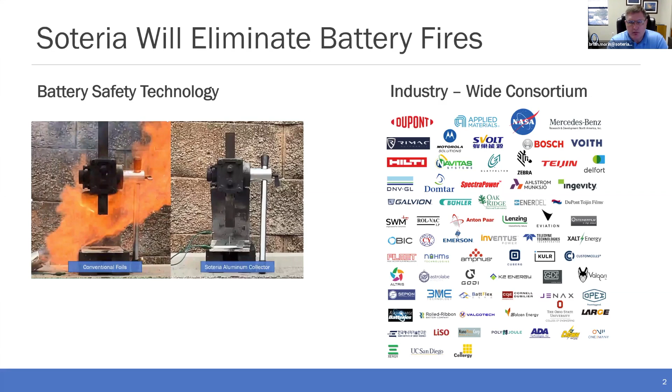They have about a $500,000 electric supercar, and we've told them they can pay their consortium fees in automobiles if they'd like. That's a joke. It's all you get out of a physicist.

The business model, we're combining kind of two models. So the first is we take our technology, put it out to the consortium as an open innovation platform. So think the Microsoft IBM PC platform, where all of these companies are now developing the software and disk drives and printers that need to be used with our technology, as well as developing the components and the ways to use our technology. So that's the open innovation platform.

The beauty is the hard work is being done by our consortium members, who are the best in the world at what they do. So then our route to market is to set up a supply chain that's acceptable for the battery, electronics, and automotive industry by licensing the technology to advanced materials companies. Think DuPont and Teijin sitting in Mercedes' supply chain, not a startup trying to provide a critical component. We've sold one license, and we have 10 consortium members who are scaling our technology on their manufacturing plants in order to become licensees.

The next two: because our cells will pass safety tests that every cell made today will fail, we're going to set an uncompromising safety standard that really differentiates between today's batteries and the safe batteries, which I'll show you in just a minute. And then for the companies that can certify their cells to that standard, and for the companies who use those certified cells in their devices, we're going to allow them to use the Soteria name and the Soteria mark as the sticker on the outside that tells you that the batteries on the inside are the safe ones. So the easiest way to demonstrate our technology is to show you it in action.

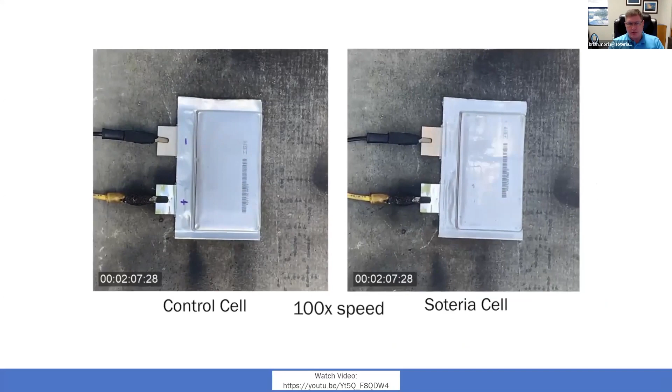I'm going to show you 3 different tests. The first is an overcharge test. So if you've ever heard about a battery sitting there on charge and just catching fire spontaneously, this is what happens. Lithium dendrites form inside the cell. They allow the cell to generate heat.

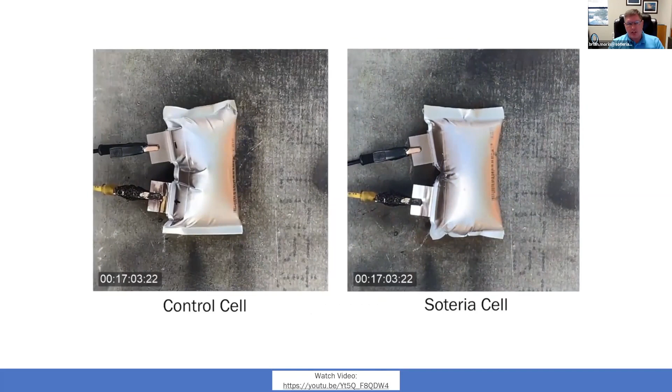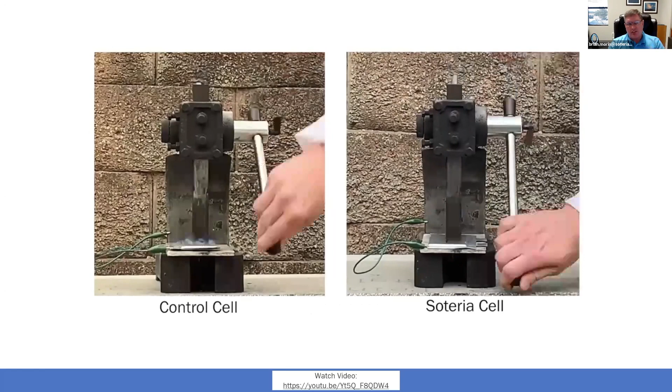That evaporates the electrolyte. And here both things are happening, but the failure mode is very different between the control cell on the left and our cell on the right. The left turns into basically a flamethrower, jet engine, whatever analogy you want. And then this is a nail penetration test, same result. This mimics physical damage to the cell. We get a very similar result under a crush test.

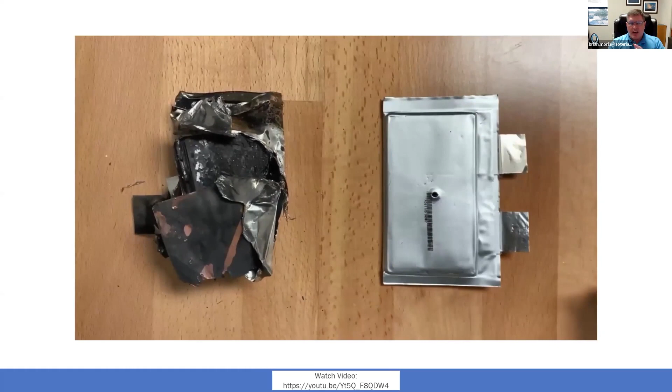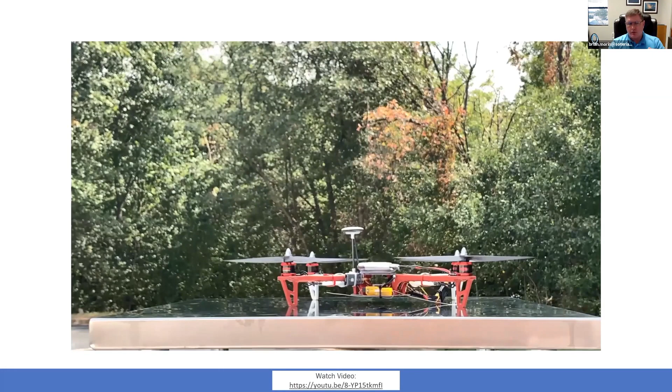But the difference is not only does our cell survive the test, but it continues to function just as it did before the damage. And now I'll give you that as a demonstration. It's almost a gimmick to light an LED with a battery that's been damaged because it just doesn't take much current to do so. It's absolutely not a gimmick to lift a drone off the ground.

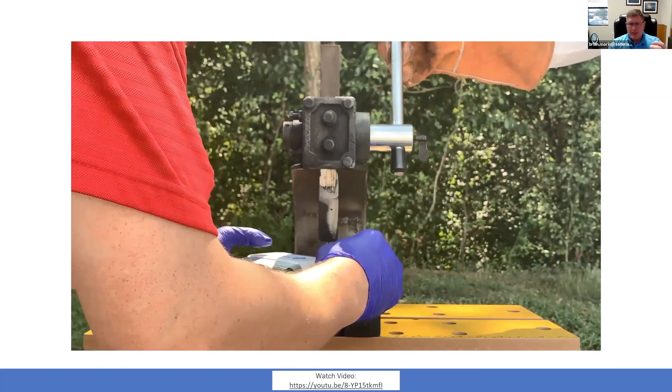This is a 15 amp application, 15 amp draw out of those small batteries. And these guys are obviously not worried about driving a nail through a cell. We've done this hundreds of times. We've never had a failure with our materials. It always fails with the existing materials.

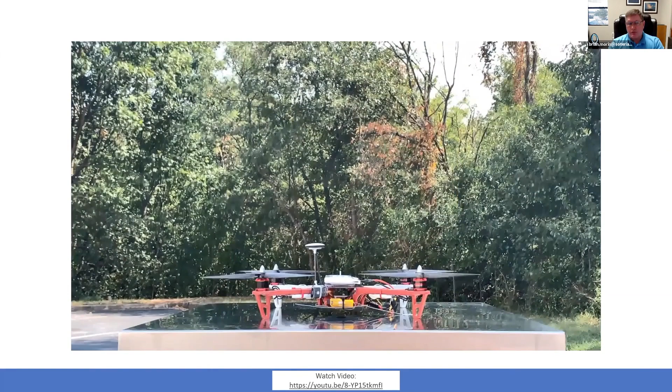And so now you've got 3 cells on the drone here. You can see the nail on the left. You can see the nail sticking out of it here. And like I said, this is absolutely not a gimmick to be able to pull this much current out of a damaged cell. And you can think of lots of situations where you'd want your devices to keep working.

So think military, think anything that's in the sky, anything that's on water or underwater. Functioning after damage is a key safety component, not just surviving the damage, but functioning afterwards. And this is the only way to do this. There's no other technology that delivers our level of function after damage. In fact, nobody even talks about that. They talk about surviving damage. Nobody even talks about the battery continuing to work afterwards.

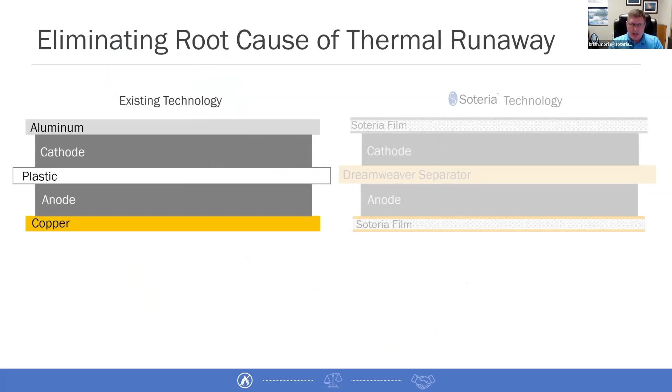So 90-second science lesson. Every lithium-ion battery has 5 components: aluminum and copper foils, the electrode materials, the anode and the cathode materials coated on the foils, and then a plastic membrane in the middle. The foils bring the electricity in and out. The ions pass back and forth through the membrane from the anode to the cathode.

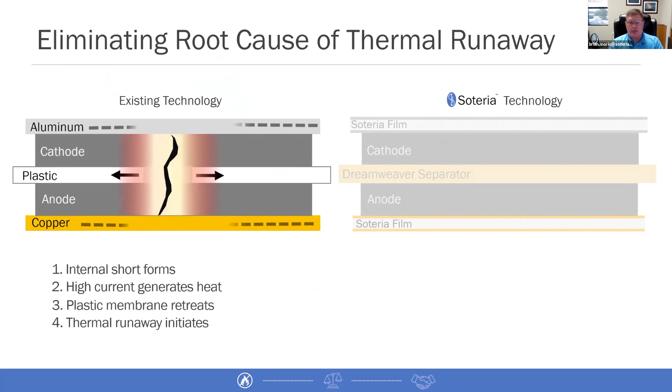Every lithium-ion battery fire starts when something punctures or damages that membrane. The energy of the battery flows through it and generates heat. That heat causes the membrane to shrink, which generates a bigger hole with more energy, more heat, and this becomes the spark that lights the battery on fire.

We're going to do 2 things different. The first is we replace that plastic membrane with a nanofiber-based non-woven separator. We start with textile-grade fibers, inexpensive raw material, fibrillate them to nanofibers in a paper-making process. It's water-based, no impact on the environment. And then we feed those into a paper machine to make our thin uniform sheet.

They're reinforced with Kevlar, which is stable to 500 degrees Celsius. So this nanofiber-based separator is never going to melt or shrink. The other thing we change is we replace the aluminum and copper foils with metallized film. So a thin sheet of plastic with enough metal on each side to run the battery. Think a potato chip bag or a party balloon.

Now, when you get something that damages or punctures the membrane, the energy flows in briefly. The separator may char if there's some heat, but it won't melt or shrink. And now those intense currents cause the thin metal of the current collector to burn out like a fuse. It stops the flow of energy, and you have a working cell with a dead spot right around where the damage spot is or where the fuse is.

And that's what you saw in the videos, is that we damage it. This technology isolates the damage from the rest of the battery. The rest of the battery keeps working, and you have a functioning cell that's made it through the damage or the manufacturing defect or the other things.

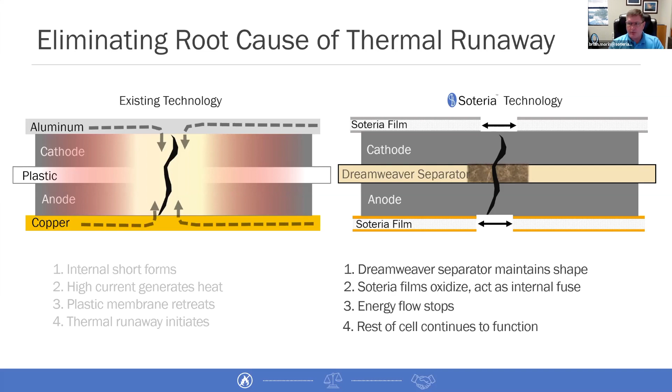And I'll say right now there are 3 electric vehicle recalls going on: Hyundai, General Motors, and BMW, because of electric vehicle battery fires. So this is an important problem. So 3 pieces to our value proposition. The first is the revolutionary safety, that we eliminate the root cause of thermal runaway and the cells continue to function after they're damaged. The next piece is important in that we do this without requiring the cell maker or the end user to suffer through any sort of a compromise.

So because we get there by taking metal out of the battery, there's between a 20 and 30% weight reduction at the pack level in the device. There is lower material costs. Essentially, that copper is expensive, and we make 10 times as many batteries with the same amount of copper that the other guys, the current technology, uses to make one.

Our inert components are a drop into all lithium-ion battery chemistries, all lithium-ion battery form factors, sizes, and shapes, and the manufacturing processes. So they just take the one that looks like a roll of aluminum foil, bring it to where they would process the aluminum foil and use it in the same way. And then we deliver the same or very similar electrical performance to what they have today and expect. So there really are no compromises.

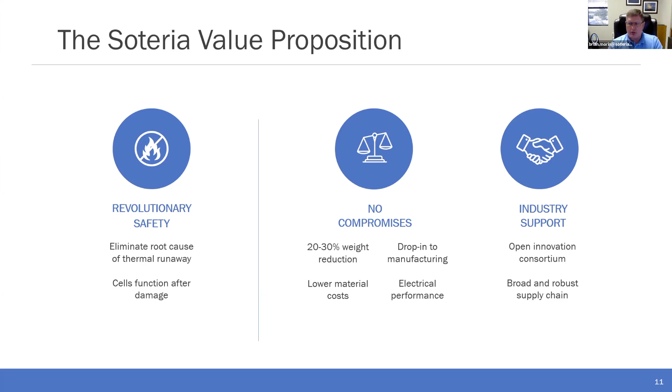And then the last pillar is the industry support that I mentioned with an open innovation consortium, lots of work going on to implement our platform. And then the other piece is the broad and robust supply chain, that nobody's stuck with a sole supplier. We're going to have a broad supply chain.

Similarly, the costs are driven down. The impact on cost isn't as high because the cost of these components is only 16%. But the good news is that the cost goes down, not up. So we expect our component cost in large volume to go down by between 20 and 40%. And the beauty is that we're having a major impact on the performance of the cell by affecting lower cost items. So even if somebody made a premium product, it wouldn't increase the cost of the cell by very much.

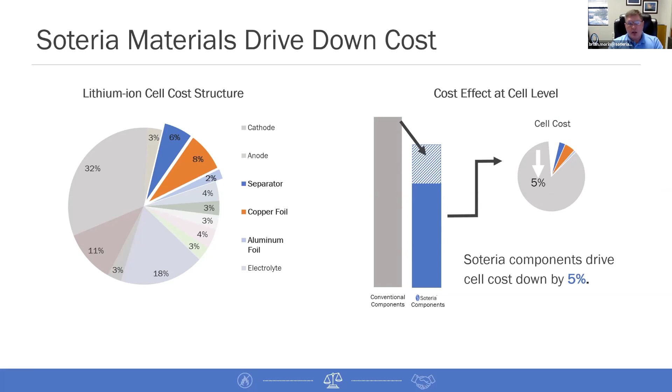We do have competition. Today, people are providing safety by taking the unsafe cells and putting them into steel boxes. Every Tesla has a titanium plate underneath it to protect the cells. And there's a lot of complexity. It amounts to a 30% weight and cost burden on top of the cells to accommodate the unsafe cells that are used today.

Solid state batteries are not ready for full production. The best people are doing are very small cells in very small quantities. They're not compatible with existing manufacturing. So it's going to be a long time before we have solid state. Although there's a lot of money being invested, and I do hope they're successful. I think there's just going to be a large market opportunity for us, even if they are successful.

And then non-burning electrolytes, people are working on it. There's a significant electrical degradation of the cell when you use the non-burning electrolytes. They don't give the same performance.

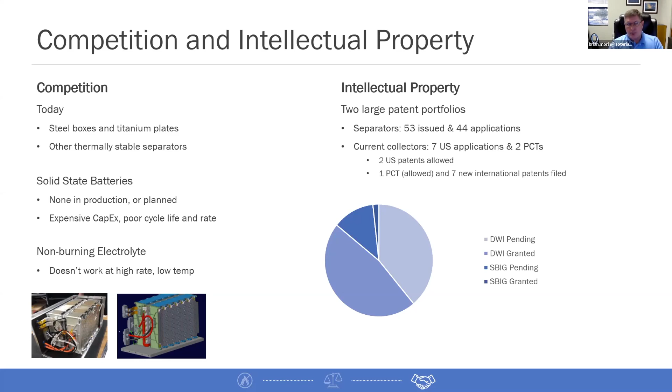And then our launch in the market, we're going to have our biggest impact in electric vehicles, but the right place to start is critical environments where they have to have safety, where the standard of safety is really perfection. And so think a first responder handset. If somebody's in the middle of a fire, they don't need their handset to stop working because it got too hot.

An electric vehicle that's down in a mine, oxygen is a scarce resource down there, so they need to use it, not use it burning up their escape means. Soldiers, and then anything going through the air, but especially delivery drones, they're not allowed to drop those, especially in flames, on uninvolved people. We're going to do these markets starting now, but then in 2021, and transition to the adjacent mass markets in 2022.

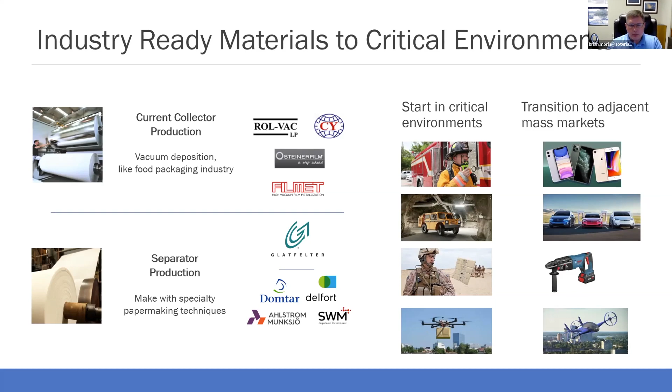We'll get our royalties from one segment, and that is the paper manufacturers and the metallizers. Everybody else doesn't have to sign an agreement with us. They just have to buy the materials from these guys. So they see them either as a customer or as a supplier, depending on where they are on the supply chain. Our business model has three sources of revenue. The first is membership fees. Everybody on the previous page is paying membership fees. It was $200,000 in 2018, $480,000 in 2019, and going to be over $600,000 this year.

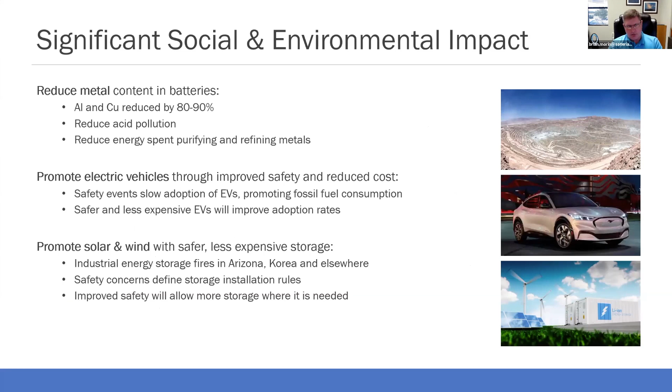Obvious social and environmental impact: increasing the safety, promoting electric vehicles, solar and wind. The part that people don't think about that's also unique to us is the impact on the environment through the reduction of the metal usage. We have a great management team. All of us have advanced degrees. All of us have experience in large companies and at a C level in small companies. Jean Lee represents us in China, and Jürgen does in Europe. Our advisory board, we meet twice a quarter, so very active. Sun Ho, Brad, and John are all senior executives in lithium-ion batteries for more than 10 years, and Randy was a direct report to Jack Welch and has been CEO of three different billion-dollar companies. We've won a number of different awards. Most recently, we were named the #1 battery company and #1 overall in the New Energy Challengers.

And then I'll close with the terms of the round. We had to increase the size of the round. It was oversubscribed at $2.25 million, so we've increased it to $3 million. And it's participating preferred shares with a pre-money valuation of $12.5 million. And this group, we're giving second tranche coverage, even though the second tranche is finished, which has 20% warrant coverage. We are closing the round on November 15th. So the board has asked me to go back to running the business rather than raising money.